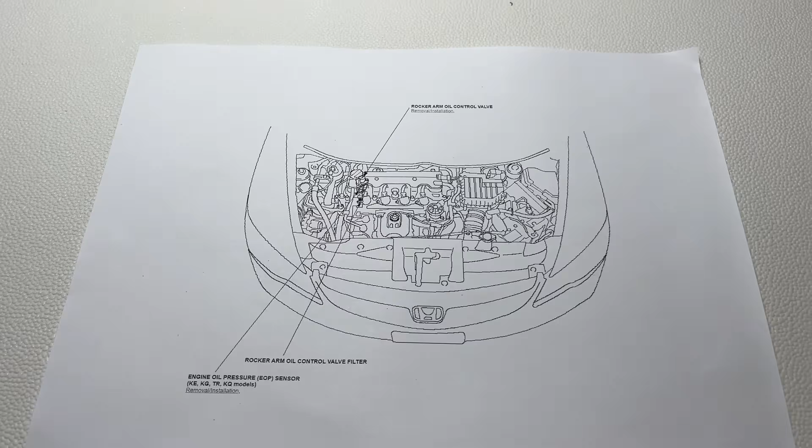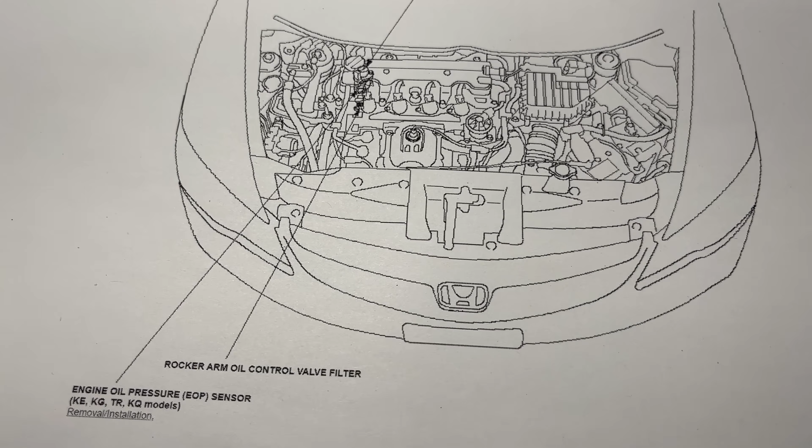But first, let's go to our favorite website, civic.hondafitjazz.com, and we can see all the diagrams are available for us to study. So if you take a look here, this is a diagram of the 2006 Honda Civic, and we can see that we're gonna be working behind here, behind the engine. It's very obscured. But this is what we call the rocker arm oil control valve.

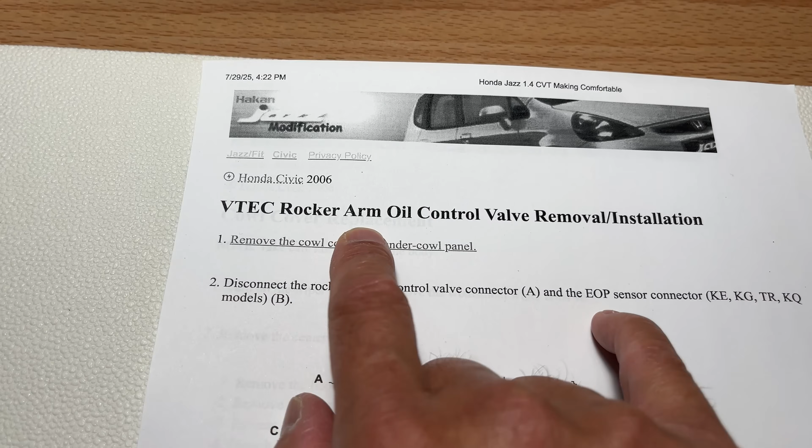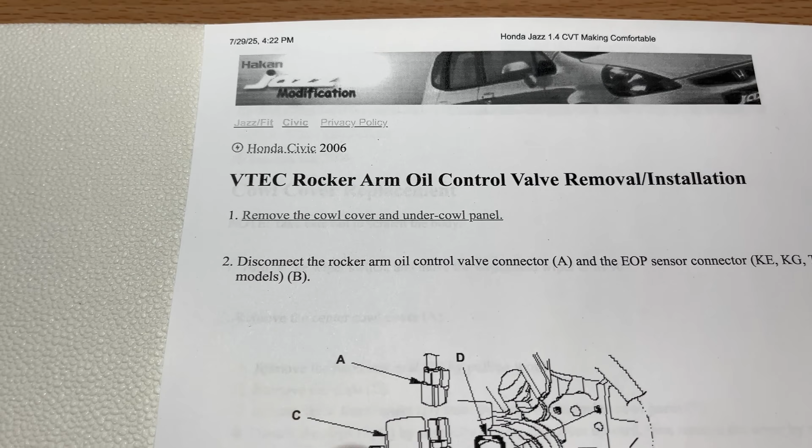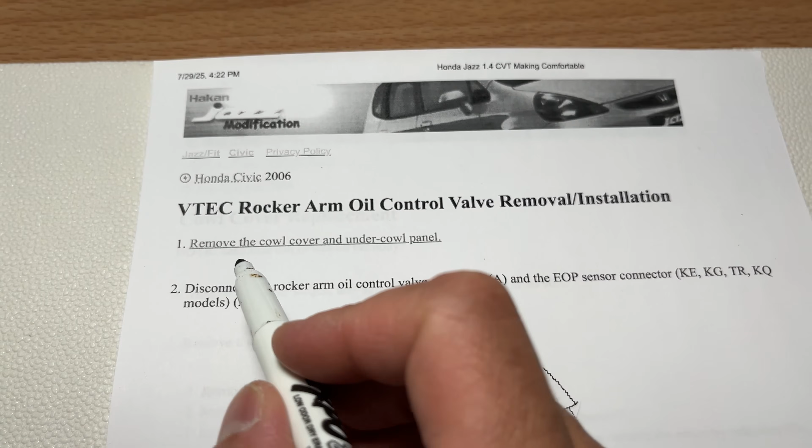It's back there. And here are the official instructions from Honda on how to remove the VTEC rocker arm oil control valve, also known as the VTEC solenoid. We're just calling it VTEC solenoid. Now, according to the official instructions, you have to do a lot of extra stuff. So step one, remove the cowl cover and under cowl panel. Now, first thing I'm gonna say is we're not gonna do that.

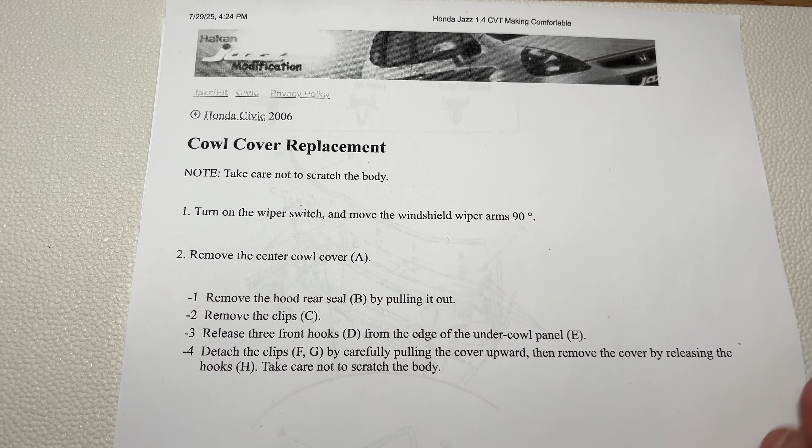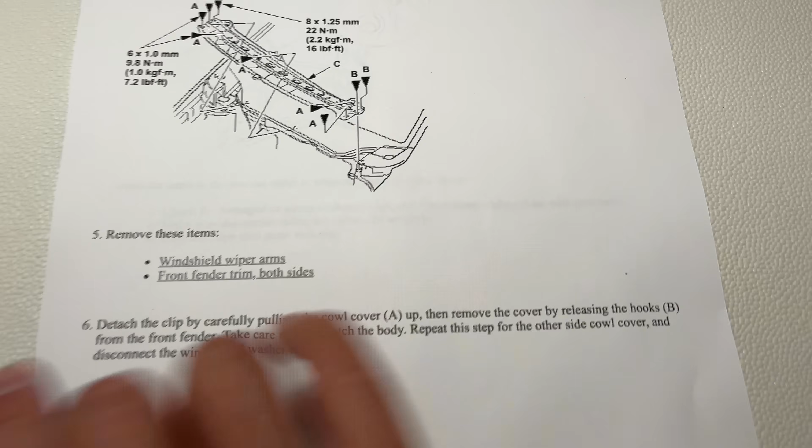So fortunately, our technique is a little bit easier to do, but does not follow the official instructions. So scratch that out. For those people who are interested in doing it by the book, there are videos who talk about how to do this, I'm just gonna skim through all these steps. The cowl cover replacement: remove this, remove that, all these fasteners, clips, take off that panel to allow access, take off this panel underneath, take off the windshield wiper arms, blah blah, take this off, take that. We're not doing any of that. We're gonna save you time doing it the quick method.

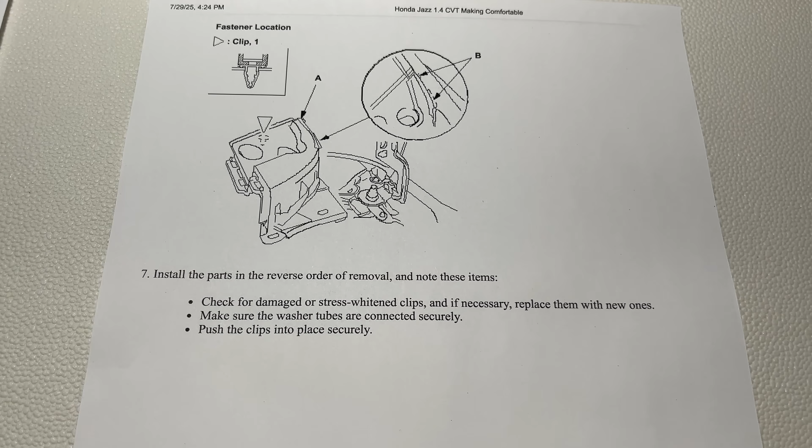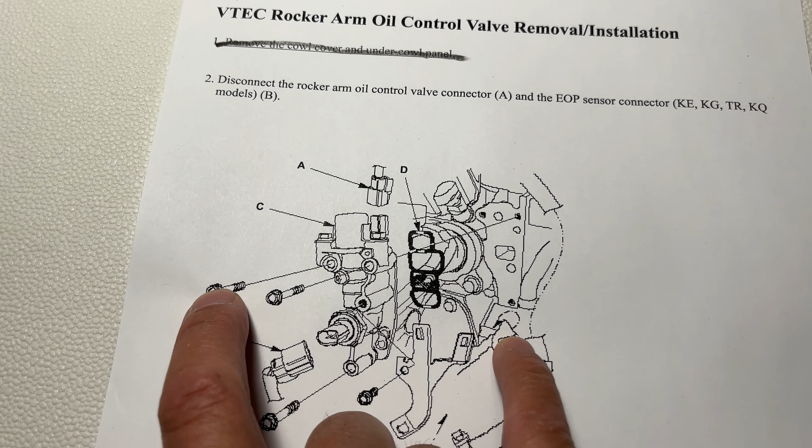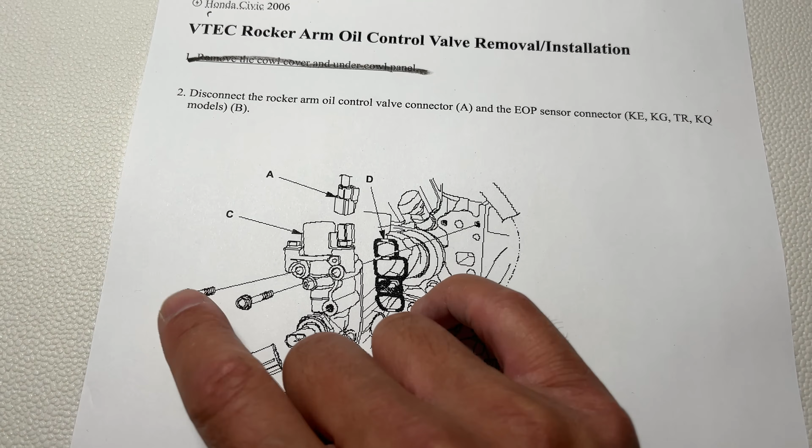Now, here is a diagram of that VTEC solenoid, and it's behind the engine. We can see here's that unit, and it's fastened by these three bolts here, this one and this one. There's an electrical connector up here on top, and there's another electrical connector right here. So the goal is to remove the electrical connectors and then remove these three bolts. There's another bolt here, which holds in this bracket, which a lot of the harnesses and hoses are kind of attached to, and we are also going to be removing that to make things easier.

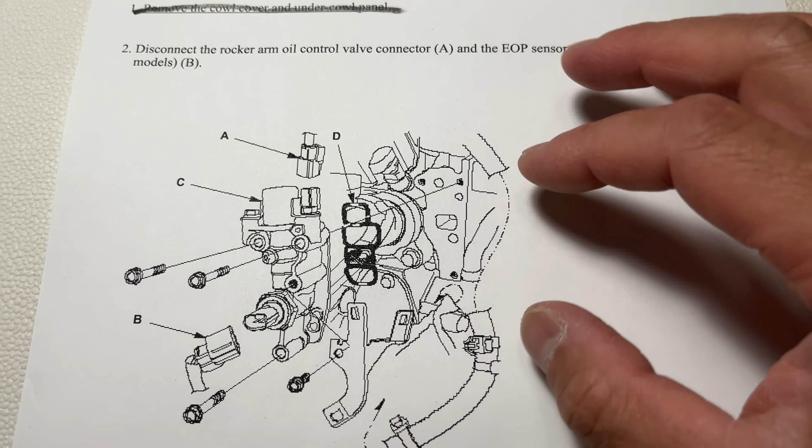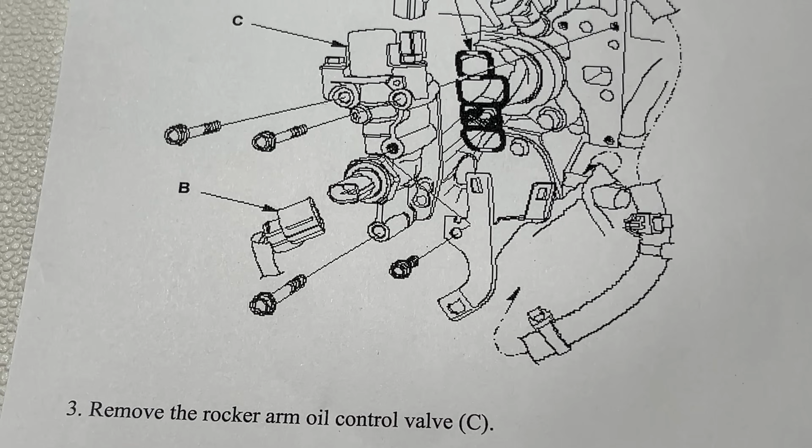But if you look here, this VTEC solenoid unit is pressed up against the back of the engine head, right here, through this gasket. This is the gasket here, do you see that? It's this thing that has 4 little compartments on it. Now, it's not always called the gasket. We'll get to the real name in just a second, but that's what it is. So you remove the rocker arm control valve, install the rocker arm control valve in reverse order of removal with a new rocker arm oil control valve filter. That's what it's called. All right, let's check it out.

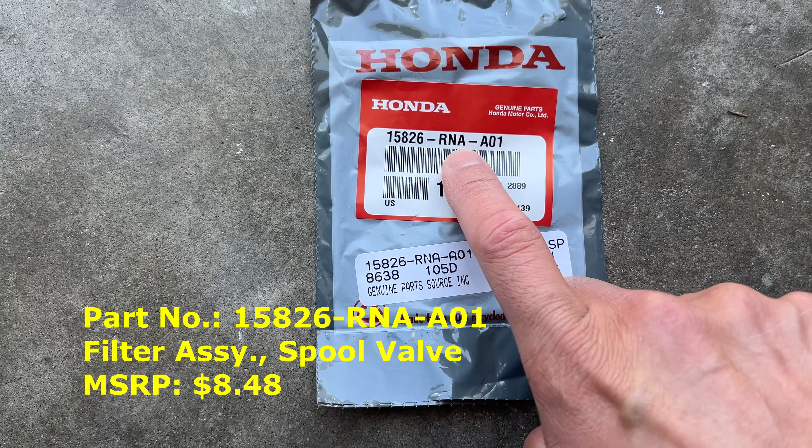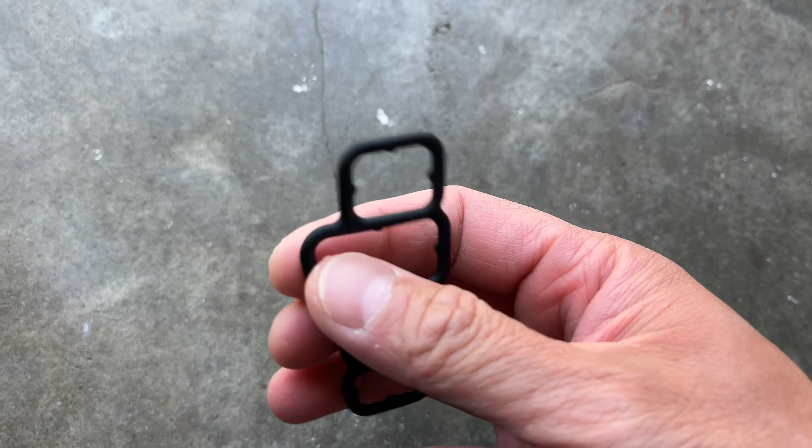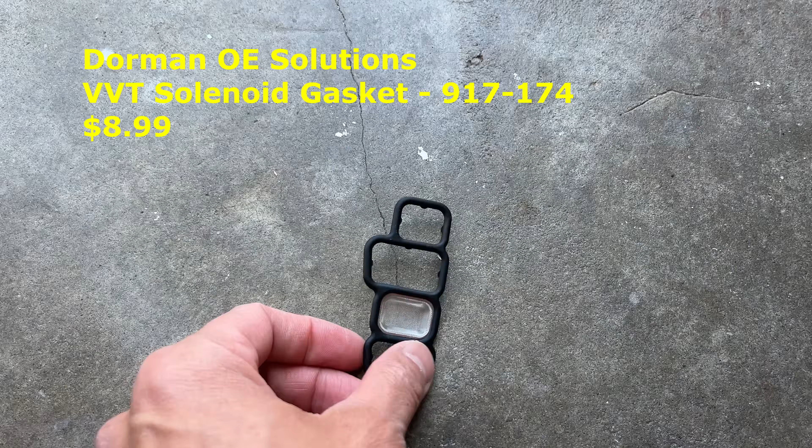This is the part number 15826-RNA-A01. This is the genuine Honda VTEC solenoid gasket. Here it is, let's take a better look at it. It's a rubber gasket with these 4 little windows on it, and one of the windows has this special looking little screen right here. This is the gasket that we're going to replace. Now, they do have an aftermarket version of this, I think it's from Dorman, but I do recommend getting the genuine Honda version.

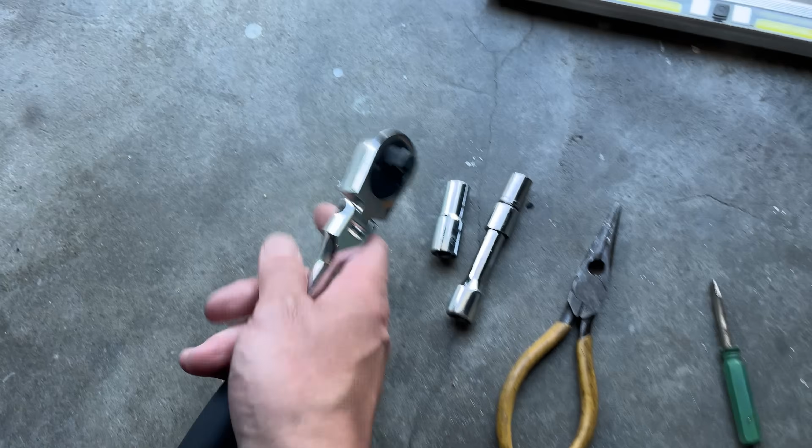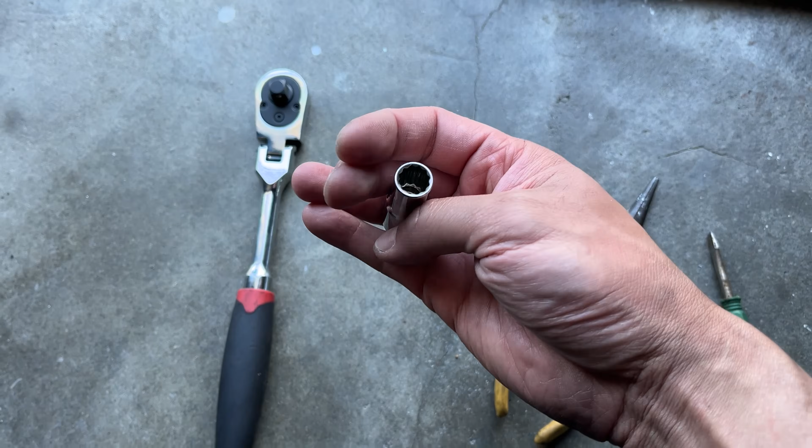Okay, and in terms of tooling, you actually don't need much to do this job. You do need, though, a ratchet that has this flexible head. So you need a flexible head ratchet, and that will help you get in the angle behind the engine over there. You need a 10mm socket. Now, there's 2 options here: you can use a deep socket like this, or you can use an extension, short extension, and I've got some adapters here with a 10mm at the end. So either or, but you don't want to go too deep because then you might hit the back. I'll use this in the video, but again, you have options. You need some pliers to just get the clips out of the way, and also a little flathead screwdriver.

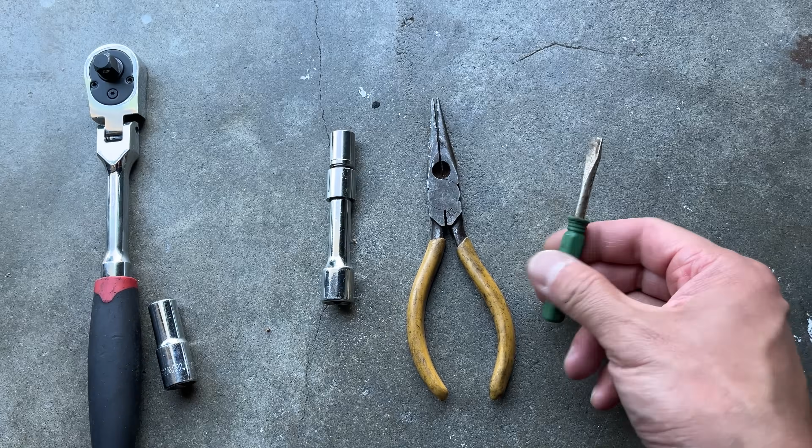That helps to pry off one of the holders over there, the cable holder.

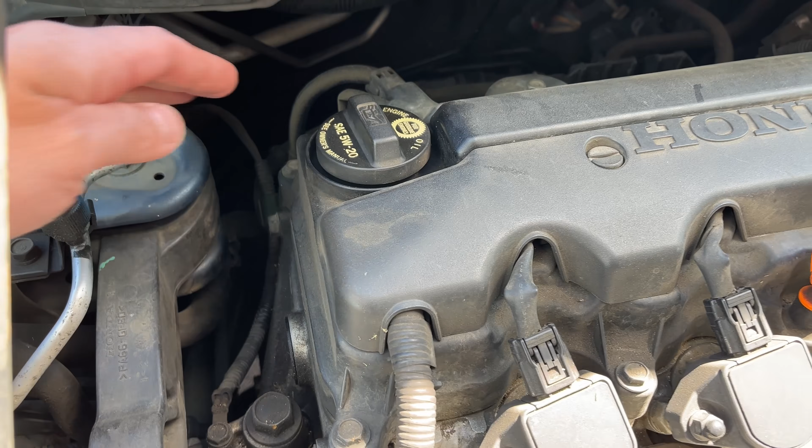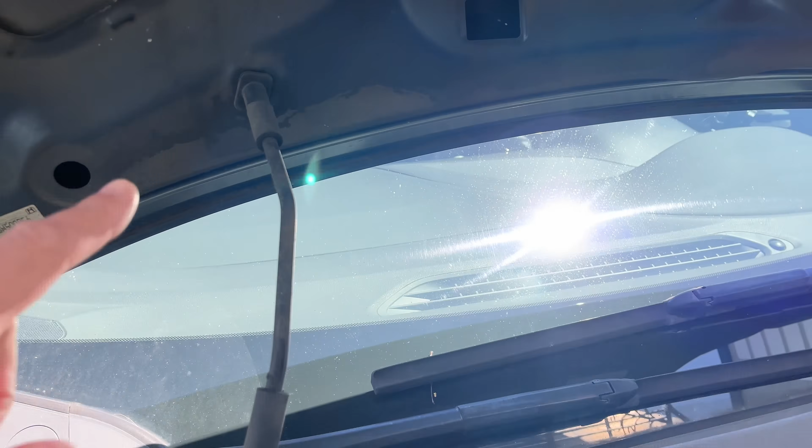One of the hard parts about this job is that the VTEC solenoid is behind the engine, deep into the engine compartment, so it's not easy to see. You might even have to use your imagination. I've lifted the hood up and used the hood prop on this hole right here so there's more clearance to reach back there. But if you look here, this is the VTEC solenoid.

What we need to do is free it up. It's got several connections - we need to take off this wire, take off that wiring harness, and there's another electrical connector on the bottom. Then we'll be able to undo the bolts holding it in place and take it out.

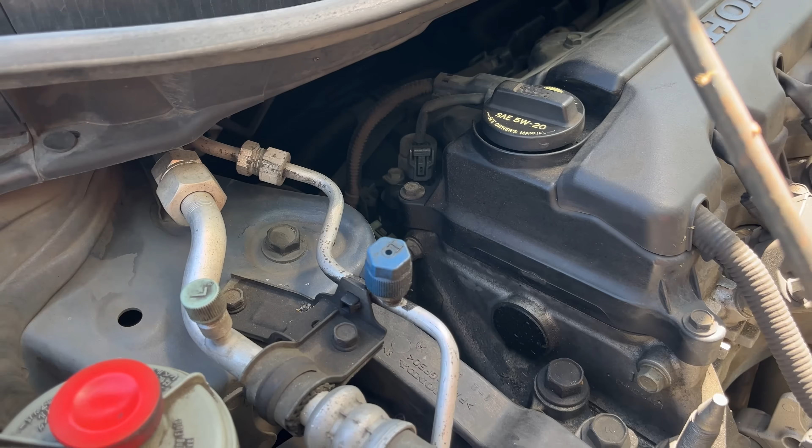If your engine bay is still hot, if you just finished driving, make sure you let it cool down a little bit, at least 30 minutes before you start working on the car, because the components will be hot. In a number of videos, there are different versions of what you may need to undo and remove to take out the VTEC solenoid in the back.

Basically the idea is the same. Some guys may say remove this harness here, remove this connector here, remove that there. But essentially what you're doing is creating the space and freedom of movement needed to get that VTEC solenoid out of there. So do what you need to do and keep track of what you did so you can remember to plug it back in.

Some essentials obviously are the electrical connections connected to the VTEC solenoid, and there are two. But then there's also this harness over here that we may need to take off.

I'm going to start by taking off this electrical connector here - just press it down and pull it away. That was easy. Now I'm also going to take off this green one over here, sticking my thumb in this little tab right here, pushing outwards, and lifting this out of that little tab slot.

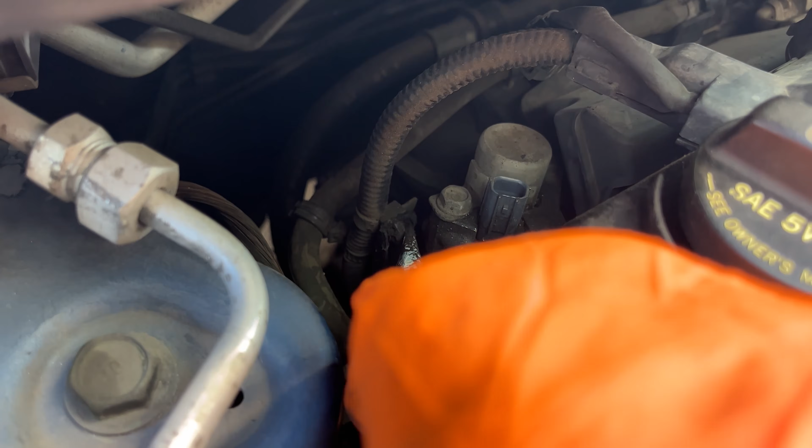The next thing I'm going to do is undo this clip right here. This little clip is what's holding this harness connected to the bracket over here, and we're going to undo that just to give it more degrees of freedom. So take your pliers, clip it on that little nib there, and push it out and away.

There we go, we got it out. We pushed it in and pulled it out.

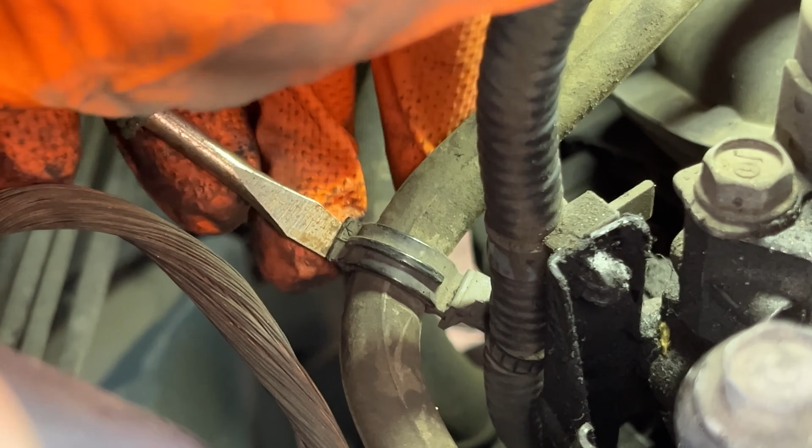Next thing you want to do is undo this little clip right here. So I have a short screwdriver here, and there's a little area where you can just stick it in and wedge it out. There it goes - wedged out the little clip, and then I can pull this hose off.

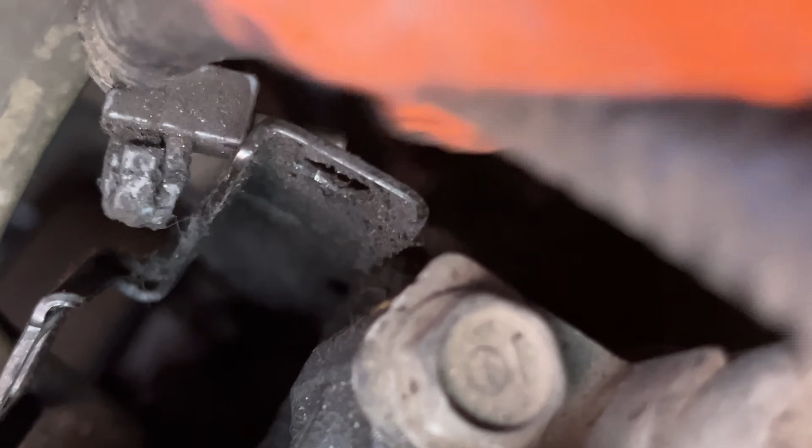Now back here there's a connector. Do you see that electrical connector over here? It's a little hard to see, but I got the camera in a position where you can see it. You want to pull this off here, so we're just going to maneuver our hand down there and unplug that one - just squeeze together and pull off. See that? I just did it.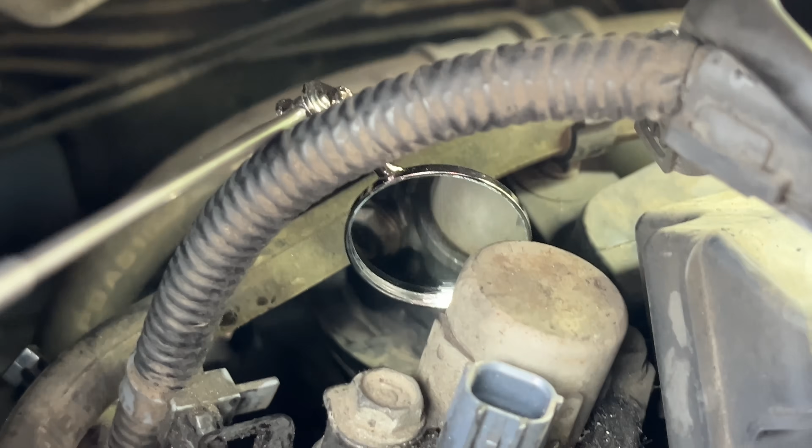Now all we need to do is remove the 3 bolts associated with the VTEC solenoid. It's actually a little hard to see, so I got my mirror out here. We have one of the bolts right here, and on the other side, you see this bulbous thing right here? On the other side of the bulbous thing is the other one, so you're going to feel around for it. But there it is in the camera right there.

It also helps to undo this hose here - you see this hose over here? That was the one connected to that grommet thing over there. It also helps to undo this so you can move it around a little bit. If you really need to, you can also undo this one, then that way you can pull the whole hose out so it's not all blocking right here. But I think technically you don't have to do it.

Okay, so I'm going to go at the bolt with my flex head ratchet and my 10mm, and I'm going to get around there and undo the bolts on the 2 sides of this bulbous looking thing. You may need to maneuver around if the cables are in the way. But you get the idea here - I'm trying to hit this screw right here.

So there it is. I'm gonna do this off camera, then do the other one next to it over here. You can even see it from the side here. I've loosened that one. So very carefully take this out, okay? Remember to hold onto your screws - whatever you do, do not drop them. I hate dropping screws and bolts. So, here it is - here's that screw right there. Set it aside. And then the second one, I've got it in about the right position here.

You can see the socket is around the bolt right now. Okay, you can really see it now, this angle over here. I've got the camera into the engine bay here, but you can see I got it right here, see? Alright, so I loosened up that second screw, and let me see if I can get you an angle of it. But it should be right here - see where the bulbous thing is? Should be right here below it.

Okay, you can unscrew it by hand after you've loosened it. And it's quite long, so it won't just fall out. But here I am just undoing it with my hand here, and I'm gonna pull it out. Alright, here is the second screw. Don't drop it, okay? Don't drop it.

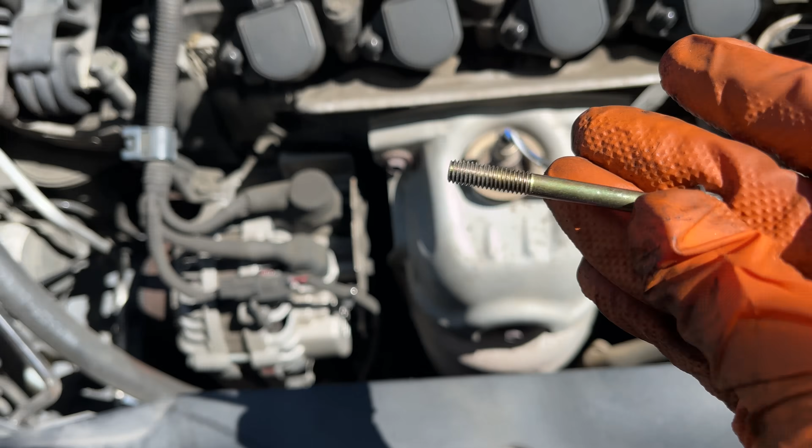Okay, so I undid this bracket screw here, loosened it off camera, but you can see here I'm actually just gonna take it out. Now this one is not a super long screw, so be careful - be careful not to drop it. But I'm gonna unscrew that, and that way this whole thing here will be a little more freer to move.

So you see how it's kind of like free floating now, okay? And finally, I'm gonna get the screw that's way down there, but it's quite hard to see. You're just gonna have to feel around for it until you get that last screw there. But once you get that, this whole thing should be free to come out. I'm gonna do that off camera.

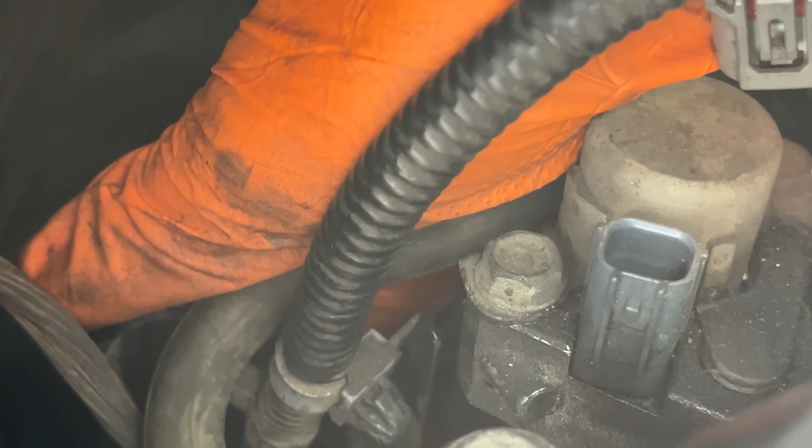Okay, so I got that final screw. It was way down there, but you can already see that the solenoid is already kind of loose. So you gotta reach way down there below the connector in order to access that screw. It helps to use the socket as kind of like a screwdriver. So if you get the socket around that, you can pull it out. I'm gonna do that right now.

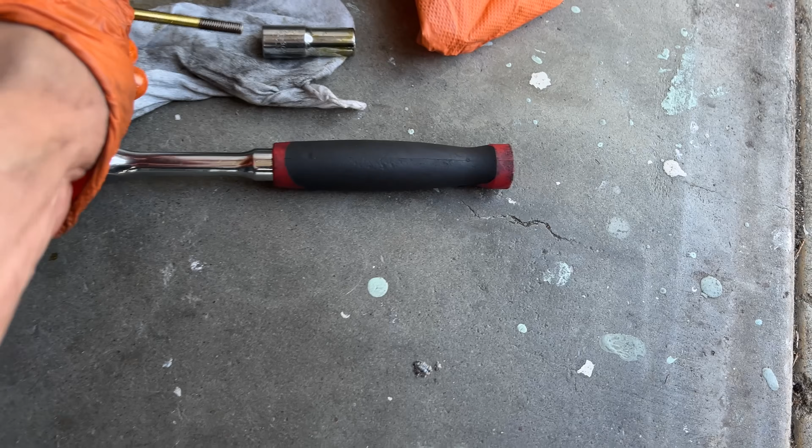Alright, so I took out the third and final screw, and it's just soaked in oil - totally covered in oil. So yeah, that VTEC solenoid gasket definitely is leaky.

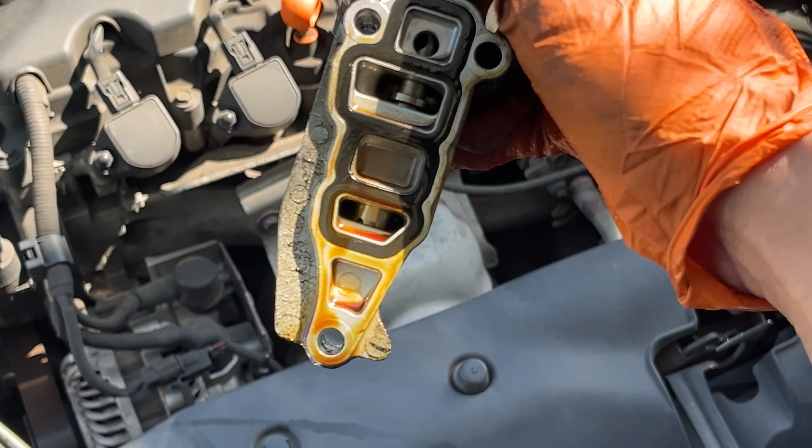And now that the thing is loose, we should be able to just pull it right out, okay? So be careful not to drop it. But we're gonna take it out. You see the gasket is still on there - the old one. So I'm gonna take it out and kind of maneuver it out of this area here, just like so. And there it is - the VTEC solenoid and gasket. And it's totally leaking all over the place.

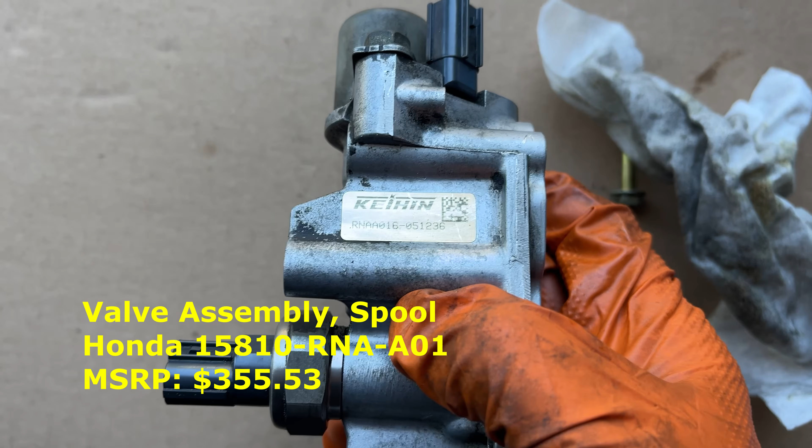Alright, so we took out the VTEC solenoid here. It says Keihin RNAA 016-051236, and I cleaned it up a little bit.

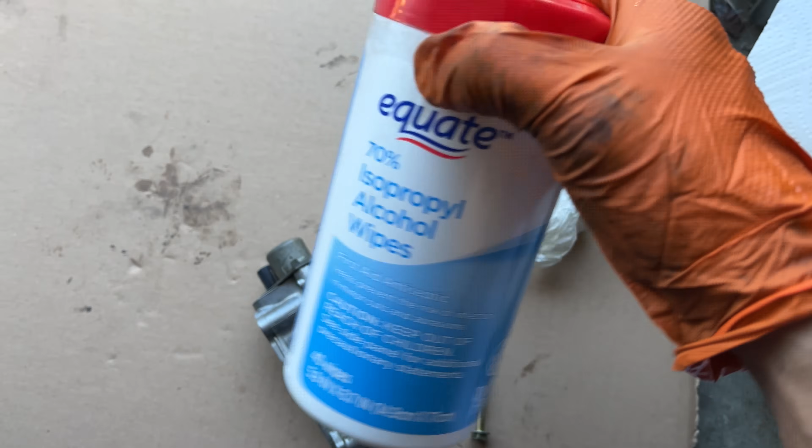One of my little secrets that I have been using for a long time is alcohol wipes. I always keep a jar of alcohol wipes - even 70% is good because, you know, they're not paper towels and they won't tear. So they're pretty sturdy, and the alcohol just cuts right through the grease. I got this at Walmart, in the medical section, actually the pharmacy area. So get that where you can get your rubbing alcohol.

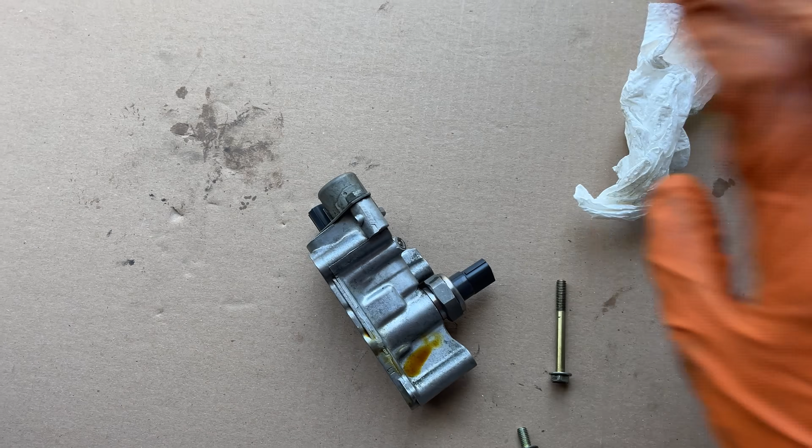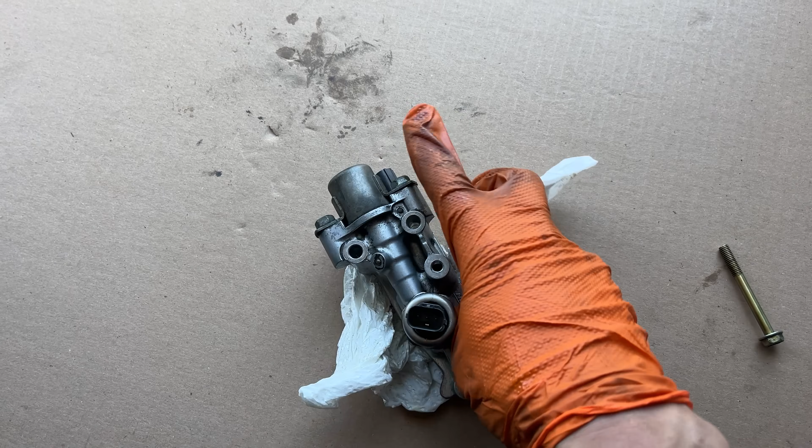So I cleaned it up quite a bit, and if we just take a look and study it, we can kind of understand the anatomy of it and why it was difficult to take off. If you see here, it's got this elongated shape. It's still dripping oil a little bit, but this is what we were trying to do - we had these two bolts right there and right there.

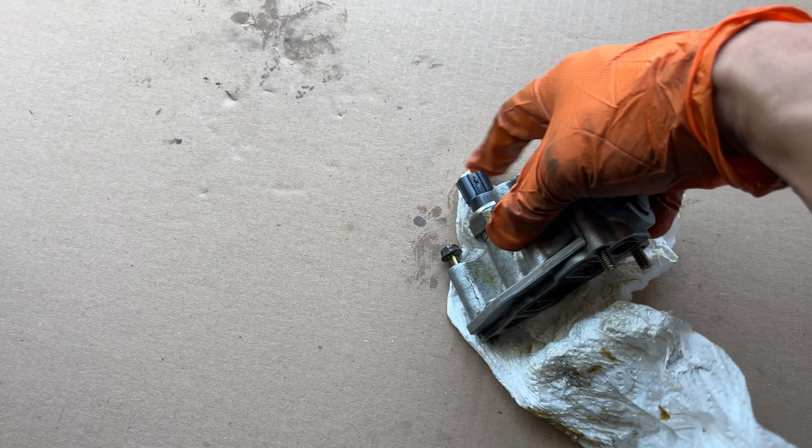Okay, it was upright like this. But we had the two bolts here, and then we have this electrical connector right here, and the third one, which is well below that, is over here. So you have to reach your hand over the electrical connector and then around to the bottom to access that one.

Okay, but it's not too bad once you are able to feel around for it. Finally, the other one I did, just to make life easier, is I took out that little harness bracket bolt. Here's the little harness bracket bolt that I took out, right here. So now you can see where all the bolts go in on this VTEC solenoid unit, and how you need to reach around to get the respective ones.

But basically on this unit, there are only these 4 that you need to think about. These 3 are the main ones. You don't need to touch these 2. Do not touch this. But there it is.

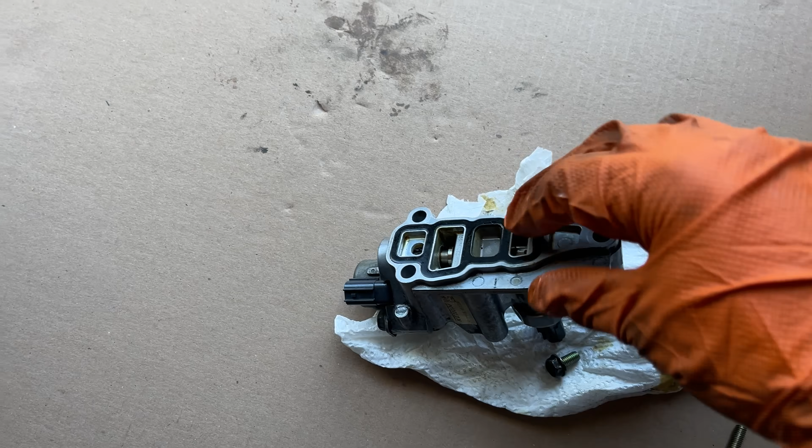All right, so now that we have taken it out, we need to replace the gasket. As you can see here, this gasket is fairly flat. It starts out round and gets compressed against the back of the engine. It looks like this one was compressed over time and started leaking around the periphery. So we're just going to take out the old one, clean up the back of the engine, install the new one, and put it all back together.

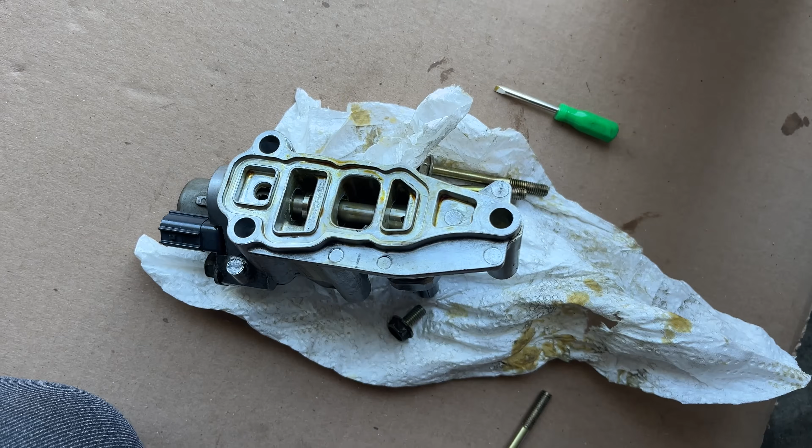So what I ended up doing is I took the plier, grabbed it by the screen, and pulled it off, and it came off. So there it is. You can see there's a special groove here to hold this gasket. Don't get it confused, it goes like this. And we're going to remember this for the new solenoid gasket.

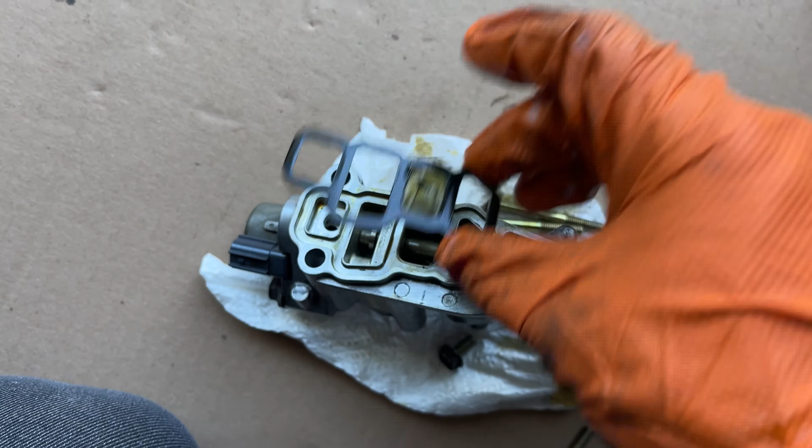Installation of the new gasket is just the opposite of removal of the old one. If we take a look here, here's the old one. It's really flat, really old, really hard. And here's the new one, still nice and rubbery and supple. The screen goes inside.

It goes into this unit here, and you can see the way this trapezoid is shaped, it's made in a way where you can't get the orientation wrong. We're just going to pop this in right here, just like so. And you see it's also got these little bits here on the edge of the gasket which keep it in place, so it won't be slipping and sliding around.

We clean that groove a little bit with our alcohol wipes, so it's nice and clean. You can also use Q-tips, alcohol, whatever you want. But just press this in gently by hand, and this side of the gasket is ready to install.

So we just need to clean the side of the engine now, make sure that mating surface is nice and clean. If you go into here, you can see the mating surface of the gasket. So what I'm going to do is clean that off with my alcohol wipe, and make sure it's nice and clean for reinstallation. But you can see there's a lot of oily residue here.

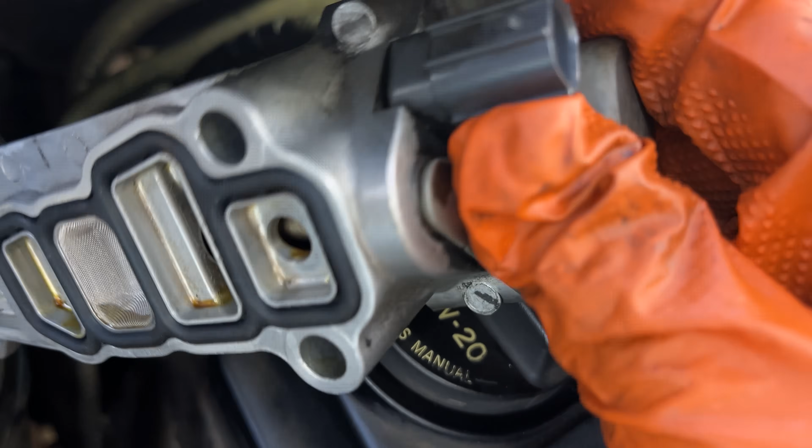Installation is the reverse of removal. So we're going to take our solenoid with gasket and kind of wiggle it in place, the same way it came out. It should be able to press against the engine, but you'll have to wiggle it a little bit, though you should be able to get it in there. Okay, there it is.

So it did take a little wiggling around, okay? But you should be able to wiggle it around, get it into position, and then try to string the screw in through to hold it in place. So I'm gonna do that off camera.

It takes two hands. Okay, I was able to get the first bolt in here. It's right here, you see, I just kind of hand screwed it in right here. And I'm gonna do the other side right now.

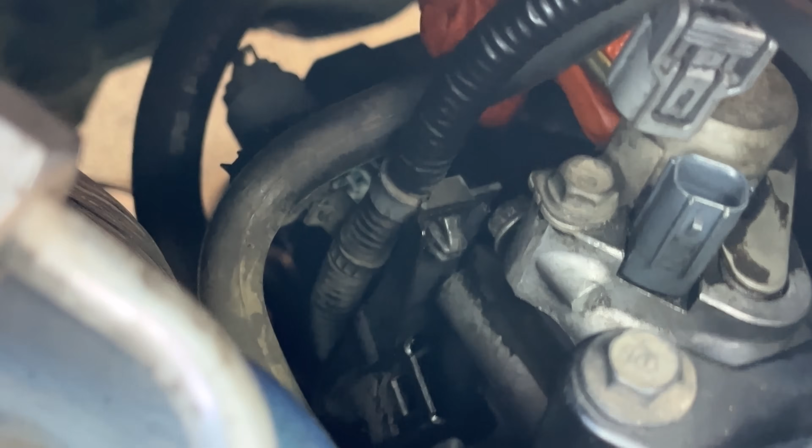Here's the other bolt right here. Just string it through the housing of the VTEC solenoid first, and it should find its way into the engine, the head. So let me go around the hose here. Again, it's a little hard to see, but stringing it in right here, and then just start turning. If you need to wiggle this around so the threads of that bolt catch, please do so.

But I already have the two, and that should give it a generally correct alignment. Then I'm gonna do the last one at the bottom, hand tighten first, and then we'll torque down the bolts. So while doing this, I found a new angle where you can kind of see the bolt, that lowest one here. If you move the bracket out, you can kind of see the bolt way down there, right in the middle of the screen. That's the one underneath the connector.

You're gonna have to reach around the connector, like here. You can hit that bolt right here where my finger is. You can do it a number of ways - you can go that way, use your left arm to come around this other direction, but in any case, screw in that one. Then we've got the two here, the one right here, and the one on the opposing side over here.

Make sure you tighten it relatively well. If you look here, my ratchet is way down there, but make sure you tighten it snug, because remember, this is supposed to compress that gasket. You can see where the socket is - I just tightened it. So remember to tighten it gently, but not over tighten.

All right, and likewise, do the upper two right here. Tighten gently - you can see that, right? Remember to compress the gasket, but not too hard. And we also need to get that one over there to my right. Tightening it now, right there, see that?